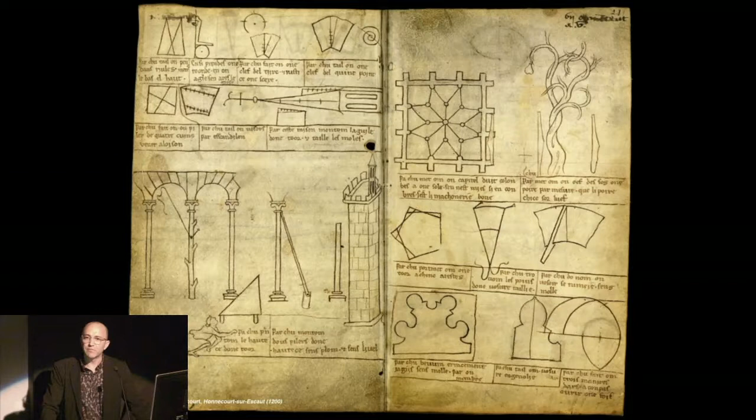If we look back to the origins of where our geometries and formal languages of how we draw architecture and how we draw invisible force flow that shapes our environments, we start to realize that in fact there are discoveries and ideas about geometry that are based in this sort of bifurcation of the experience of formal representation and the realities of complexity and natural form. So, for example, Hugh of St. Victor spoke about the fact that there are two parts of geometry: the theoretical and the practical.

The theoretical is that which contemplates proportions, quantities, and their measures by the speculation of the mind alone. The practical is when we measure the unknown quantity of something by the experience of the senses.

And I think the experience of the senses is a really important part because he's suggesting in a lot of ways that we don't actually have the full capacity to touch all of what geometry is actually calling from with all of our senses.

There was also the idea of Jordanus Nemorarius, who was starting to take these ideas of geometry and constructing mechanical models and developing ideas of invisible force flow being represented by vectors and the idea of equilibrium.

One of the origins of this idea of equilibrium is incredibly important because it suggests that things come to rest. And that idea of rest is probably the way in which most of us have been taught about structures, which is through statics, calling from the origins of this idea of mechanical systems that are in fact at rest.

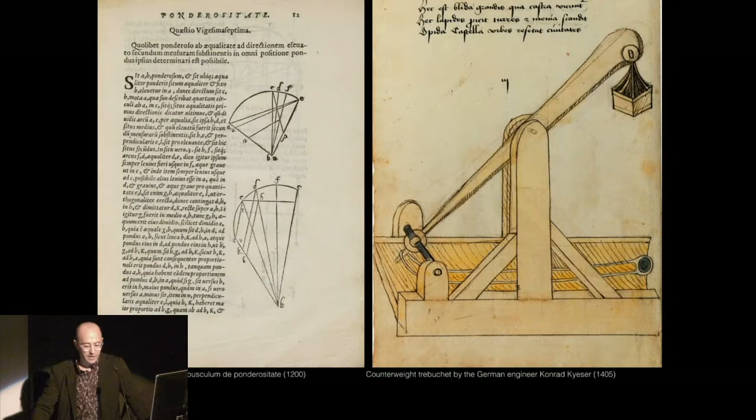It wasn't until about 1866 when force flow was represented in more than just a singular linear vector, when force flow suddenly became more like a current, a river, a direction of wind that in fact is not singular, but a series of vortices moving through space and through matter specifically.

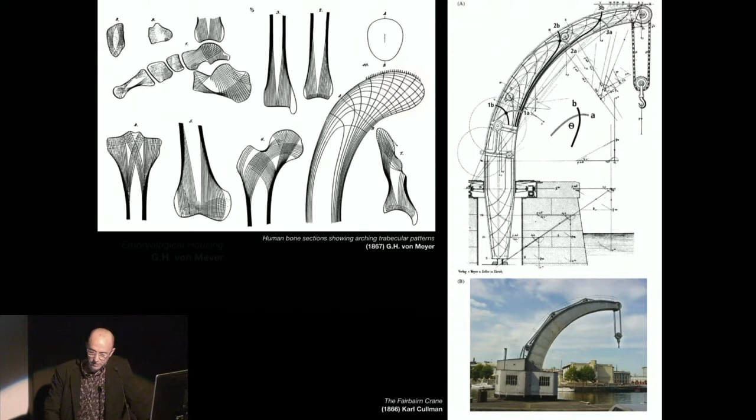So what we see here is Karl Cullman, suggesting that the arched patterns in the section of the human femur are similar to the shape and geometries of the crane he was designing, and that the forces moving through them would develop something called principal stress lines. These stress lines are a simplification, a reduction of these force flows, dividing it to say here's where compression is, and here's where tension is.

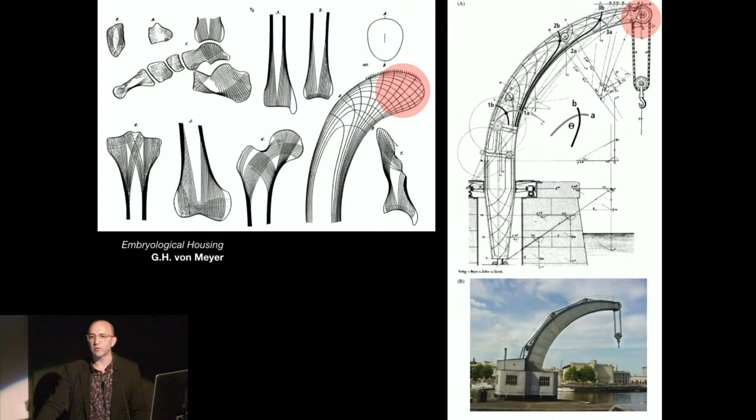In fact, most times they're at 90 degrees from each other, and that's how we get shear, if you look at diagrams. So these ideas, of course, persisted.

But the thing about force flow is that it was soon discovered, or previously, by Robert Hooke, but Sir Christopher Wren, who knew Hooke, recognized that these forces could be used as a geometric tool for design.

And of course, that in itself is something that Gaudí took through his stereostatic modeling and three-dimensional constructions, using it as a design tool.

So suddenly force flow is migrating from this thing that is representational, worked out in plan on paper as premeditated planning for the construction of a static object, to something now where force flow is a dynamic property.

Something that's able to be worked with through dexterity, if you will, for the architect or designer, to adjust and respond based on the physics of what's happening, the physical computing of the materials he's working with.

Ivan Sutherland at MIT developed Sketchpad in 1963, and this was the first time that this idea of a moving modeling system for force flow could be understood by designers, but specifically through computation, moving out of the physical and into the digital.

And of course, in between, we have people like Frei Otto and others. Frei Otto was around this time and later, working with physical modeling and so forth, but actually Sutherland was the first person to start to put it towards computation.

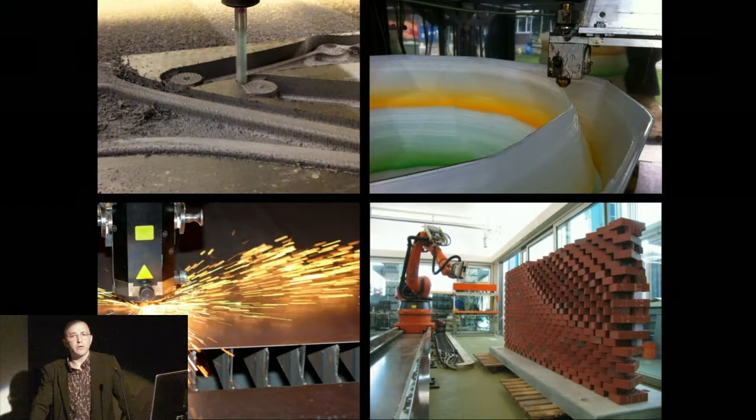So the work with these new origin materials or tools and machines, if you think about it, are actually still using the same brute force we've been using for over a century to construct and shape matter to our will. So all kinds of materials are becoming shaped by the same methods we've been using, which is the single-axis machine.

It's the same thing that's been used for cutting plywood, for the same thing as rolling steel off of a mill. These prismatic sections and shapes are in fact the same tools being used to rotate the gears to move a robotic arm, to move the printer for the 3D printer, for cutting lasers, and of course for machining.

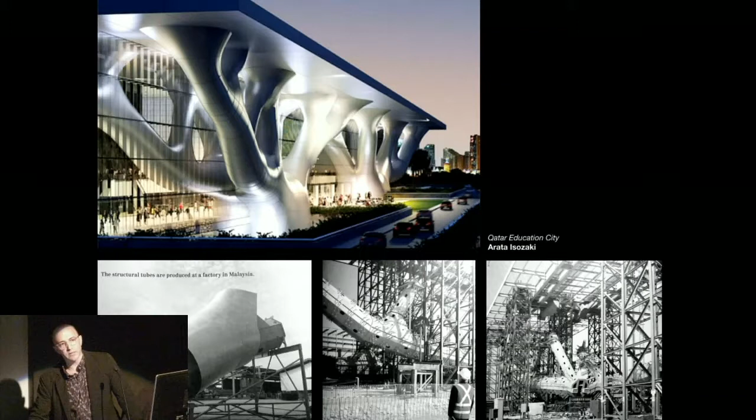So when we see projects that use parametric design to come up with fantastical shapes and unusual geometries, which may be structurally efficient once built, they don't actually take advantage of that parametric behavior during construction. Nor do the materials themselves take advantage of the efficiencies they offer through their own natural parametricism, the way they respond physically to force and action.

All of these ideas are linked to the origins of the division between the designer and the maker, after the arts and crafts movement, when we started moving from conceptual instruction to the empirical, as-built condition. Rarely was the movement of ideas going in both directions—it was very much in a singular direction. And that hasn't changed a lot, actually.

While there's a wide gamut and scope of work and research being explored, there is still this implicit idea that the designer designs and materials follow.

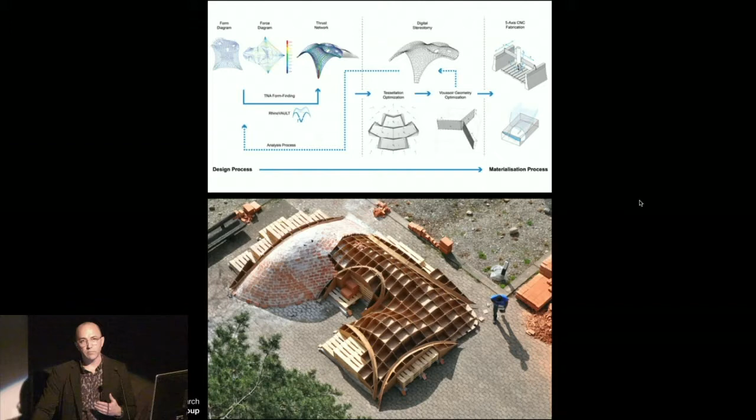If you look at Block Research Group's projects, this experimental thin shell masonry vault work comes off the traditions of Guastavino. You can see that the design process coming to the materialization process is linear in nature, directive in nature, incredibly efficient because the tools being used help facilitate that workflow. But what this does is still treat materials as passive actors in a physical condition that they could arguably participate in.

Ursula Franklin is a favorite of mine. I really appreciate her perspective on the idea of technology. She gave a great Massey lecture on CBC related to that issue and wrote books on it.

She describes technology as a multifaceted entity. It includes activities as well as bodies of knowledge, structures as well as the act of structuring. Our language itself is poorly suited to explain the complexity of technological interactions. How does one speak about something that is both fish and water, means as well as ends?

I think this is what I'm trying to get to—this idea that tools are in themselves not wrong or in the wrong direction. But the way they are designed and utilized often preempts the participation of other forms of knowledge and information that could inform our design and construction workflows when we think about new forms of architecture in terms of efficiency, geometries, and architectural expression.

So I put this forward: in order to achieve a holistic approach to technology, we must first attempt to confront the unencumbered and natural state of material and energy systems, unmediated and unrestrained by the limits of our current logic. I think this is something we're not very good at.

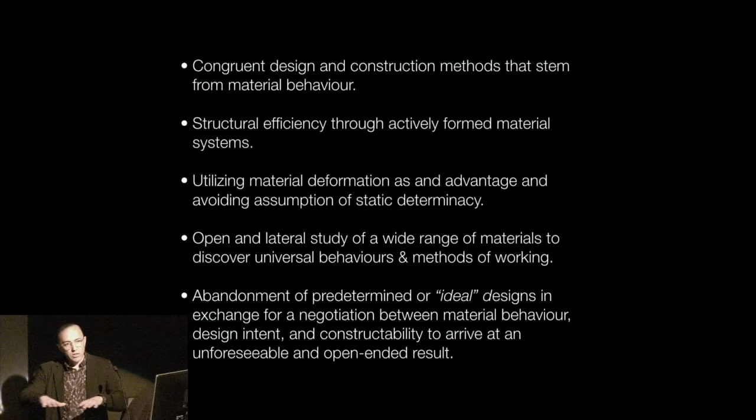Structural efficiency through actively formed material systems means treating materials as active participants — when activated, they become stiffer and stronger, and offer new geometries to play with. We utilize material deformation as an advantage, avoiding the assumption of static determinacy, and conduct open, lateral study of a wide range of materials to discover universal behaviors and methods of working, connecting ecosystems of behavior together. This means abandoning predetermined or ideal designs in exchange for negotiation between material behavior, design intent, and constructability, to arrive at unforeseen and open-ended results.

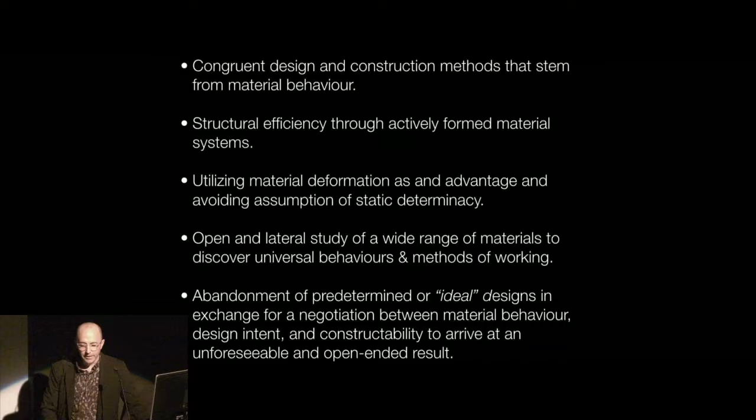As Lola mentioned, I've been doing this since I arrived at CAST in 2015, and since then have honestly been playing. The way I was raised, and my structural engineering background, didn't prepare me well to actually understand material behavior. I can design and predict static systems, and generally understand what's going on inside materials, but I had no idea how to play with them.

By starting out with materials like plaster, we realized early on that the liquid-to-solid nature of things like plaster, which cure and crystallize like concrete does — without going through phase change like ice, for example, which can go backwards and forwards — can be analogs for other liquid-to-solid materials. So when we play at a one-to-ten scale, you can play and predict at full scale.

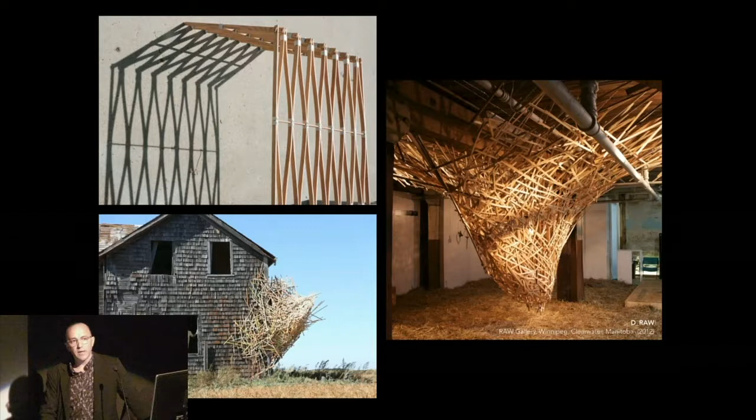Wood systems were other materials to experiment with, with their anisotropic properties — their ability to have grain and orientation and bias, and histories from what they once were as a tree and what they are now. Their desire and memories of that coming back during construction and making all contribute to the idea of flexibility in wood systems and what those can generate.

The right project was an installation I did with Ronnie Araya, an architect in Montreal. This structure evolved out of a negotiation and conversation between us and the structure — hammering these thin strips into the cracks of the wood structure above us and the floors, and starting to weave downwards together.

Fabric has been an incredible partner to work with, consistent throughout all of this work, because fabric is quite expressive. The material systems it offers allow for things working with projections, which allow for a reimagining of the ideas of perspective and Cartesian projections of structural forms and shapes, and how those can be deformed by projections.

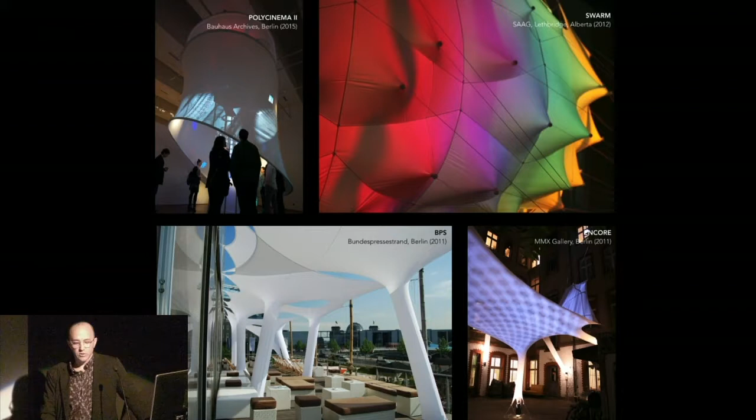Wax came about as an experiment to play with ice inside. How do you work with liquid to solid materials that can reverse cycles, and how do you work with it at a hand scale?

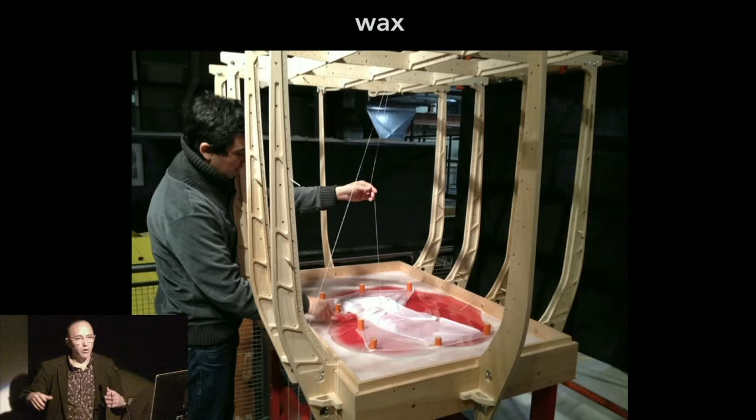So this is a modeling machine that uses engine block heaters underneath it to melt paraffin wax, and magnets are those orange pieces, and the string represents ideas about the actions one would take as a designer to shape structural forms. The wax itself is a good analog for how one would apply another liquid to solid material, like ice, water, or concrete, if you use things like shotcrete or trowel it on by hand.

Photographing them afterwards and looking a little more carefully at what they present as an after effect, the result of these actions, starts to speak to the way these structures present themselves in the world as archetypes and as architectural language that we are interested in.

I'm going to focus specifically on two materials. The first is fiberglass, and the way I began working with fiberglass was literally just trying it out. How flexible is it? What is it like?

This is fiberglass rebar. It's typically used in materials like this and in very expensive projects where rusting and spalling are predominantly the failure mode, and it's expensive to repair things like bridges. But fiberglass rebar does not fail the same way—it has an incredible capacity for tension, but also elasticity.

So by letting go of the material, we begin to sense, in the origins of that geometry definition, the way the material behaves. But this, of course, is not a new system. This is, in fact, hearkening back to those origins of efficiencies and the ideas of creating complex structures using minimal material, minimal construction energy, and highly efficient space creation.

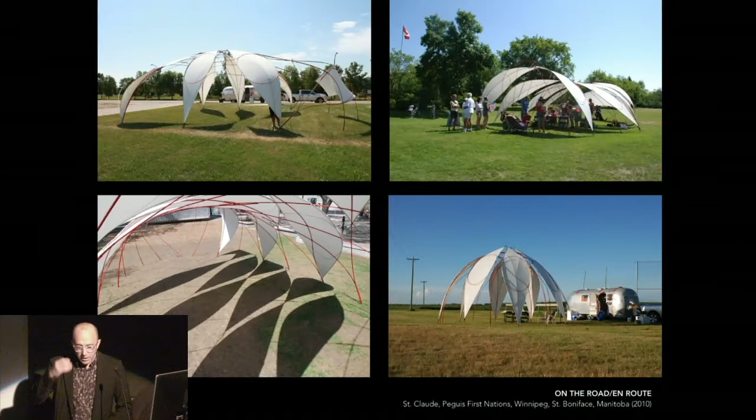One of the early experiments was a project based on traveling to seven different remote communities and working with community members there to bring modern art to their venue. This involved carrying 60 bars of fiberglass rebar on a 1967 Airstream trailer and showing up with community members to erect different structures in each community, based on the same bars but with different patterns.

What we're looking at here are these temporary art gallery venues, programmed in lots of different ways. But this was the first time I began to understand the relationship of the role of the designer as a curator rather than one that dictates the form.

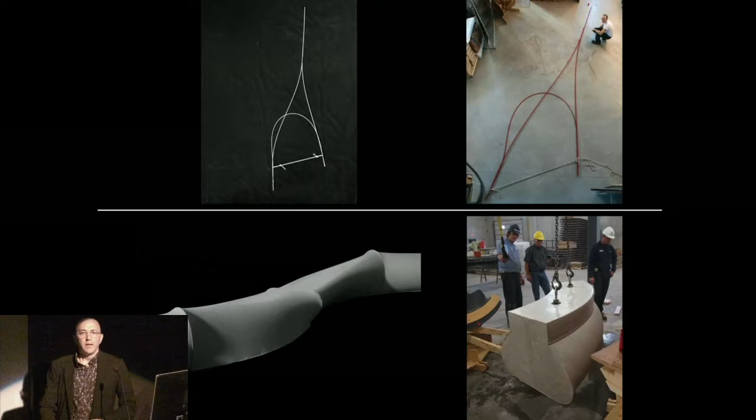This idea about synergies came to pass in a profound way when I was developing a workshop for Rochester Institute of Technology, where they wanted to build a prototype of one of these structures for their winter festival. I was trying to figure out how to send the bars—I couldn't be there early enough to prefabricate the structure for the students. In fact, it was going to be run as a workshop, so I sent instructions for them to receive the materials and start shaping these structures before I got there.

At the same time, Professor Mark West, one of the preeminent experts in the world on fabric-formed concrete structures, who also founded CAST, and whom I worked very closely with for over a decade, was working on a bench at the Women's Hospital in downtown Winnipeg.

He was working with hydrostatic structures, trying to fill sacks of formwork lining, essentially a landscape fabric, to figure out how to make sections of a bench and join them seamlessly so that the curved shapes meet when casting them separately. He began having conversations with engineers around the world and realized that the shape his bags were making was the exact same shape he was working with in model form - the purely elastic geometry called elastica.

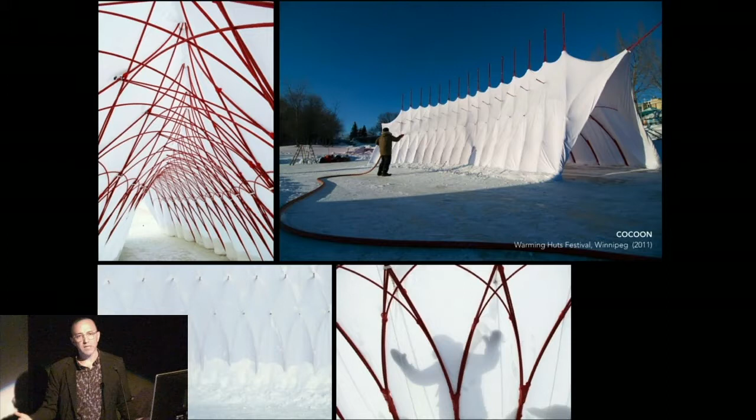From there, I worked on projects like Cocoon, which tried to integrate and synthesize the use of fabric-formed ice and the bending active frames of the fiberglass rebar to create that tunnel system.

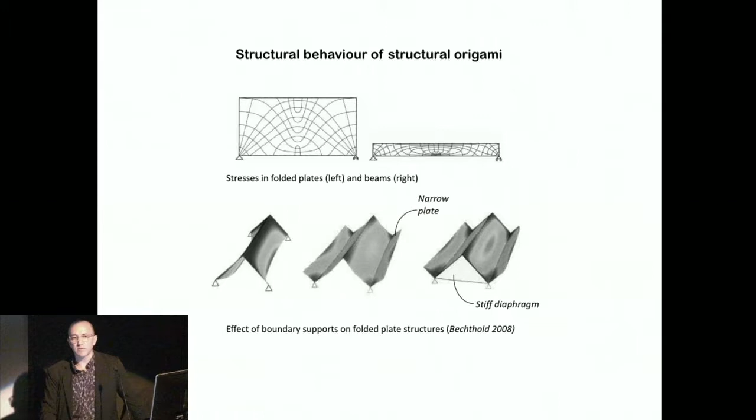The first project I want to talk about in more depth is Fabrigami. It was also for the warming huts in Winnipeg, and we decided to work with the idea of origami as a self-organizing building system, and how the structures themselves act as beams that are inclined and leaning on each other to convey forces across them.

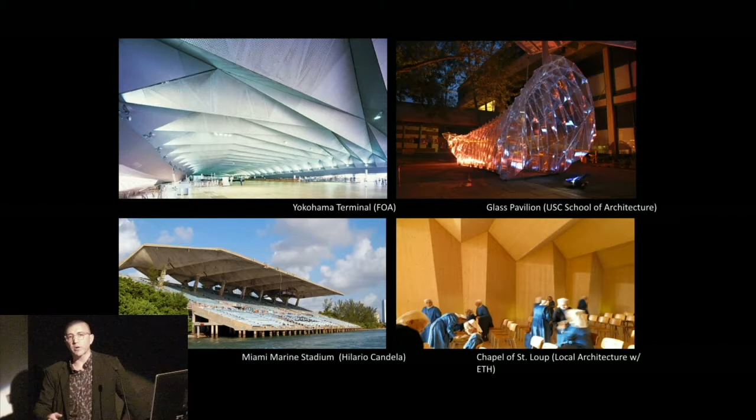But from all the origami forms that we've seen in our histories, there have been very few that have used the actual origami nature, the self-organizing principle of structural order through folding, at a full scale, because the material systems they're using come out of these origins of industrial modern shaping through force. So we tried to combine the idea of fabric-formed ice and origami structures.

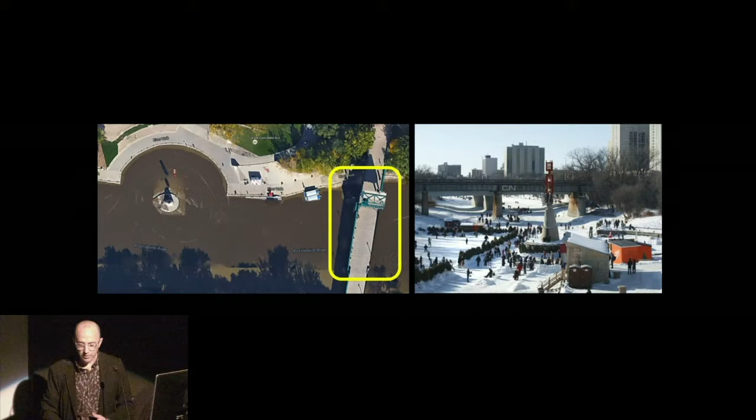The first work was figuring out the site, which was the bridge. Here you can see in the yellow, this is the bridge, and this is a counterweight, a giant concrete counterweight, to lift and raise and leverage the bridge to make space for the boats underneath.

From there, we found a basic origami design which is structural in nature. Not all origami is - some origami is simply behavioral and dynamic like a mechanism, and some are static structures like this one. We began to work with digital tools to figure out how to work with the edges of the folds as a way to work with the linkage to fabric.

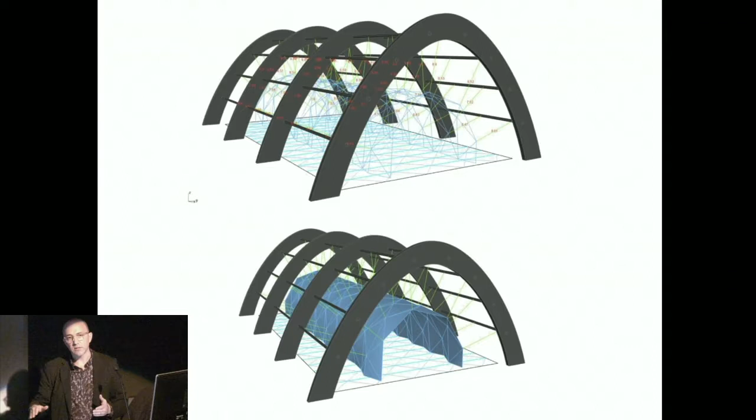If we can control the parts where fabric is being pulled taut, and we let the fabric self-organize in the valleys, then we can make a building system that's doing the folding for us.

So we began to stitch out and lace out the folding for the lacing of the fabric. You can see on the top right and top left the pulling tight of that fabric creates the general outline of the origami structure. If we lay the fabric on top of that, the fabric hanging from it will actually make the cavity system.

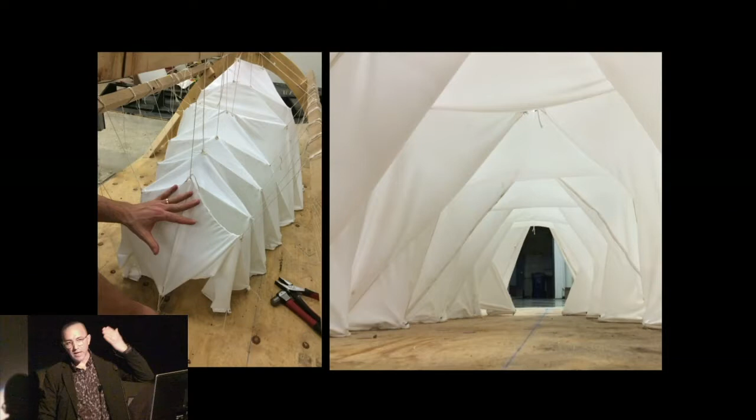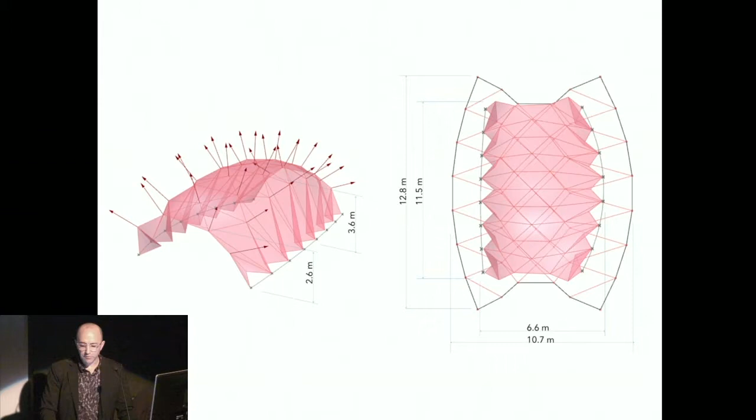So we began to explore this in a range of typologies, forms, and evolutions. We had a final form that we ended up developing, making it a bit asymmetrical to make space for seating.

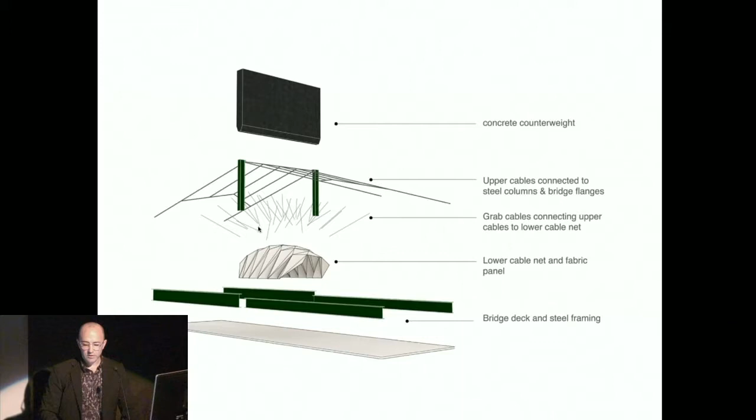We began to think about how to make an upper cable net system, which is this system right here, and then a secondary system for grab cables. Those grab cables would pull the whole thing up like a marionette, and then anchor the fabric down to the bridge deck itself.

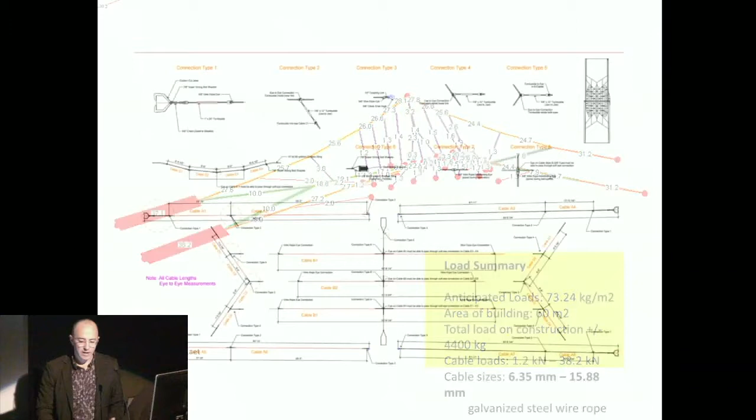We worked with the loading to be able to think about the size of the steel cables and the rigging, breaking it up into constituent parts that we could have prefabricated. Then we worked in our center space here, our largest space on campus, at least in the architecture school, to lay out the cable net and then put the fabric on top that we sewed and cut the holes.

And the construction, which is always the fun part. Essentially we laid out the construction here.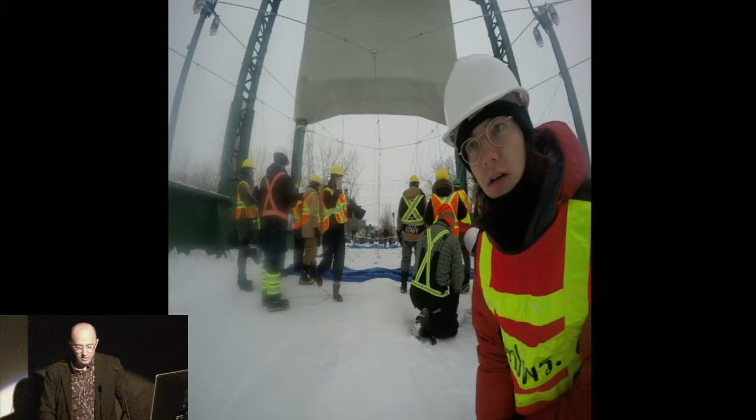You can see the upper cable net is in place - that's the part that's shaking a little bit. Then the vertical cables, the grab cables, came down through the holes and grabbed the net and then went up and down through.

So it goes all the way up and through. And then from the inside, we can pull up like hoisting a sail, essentially, till the whole structure became volumetric like we were anticipating. And we would then align that with

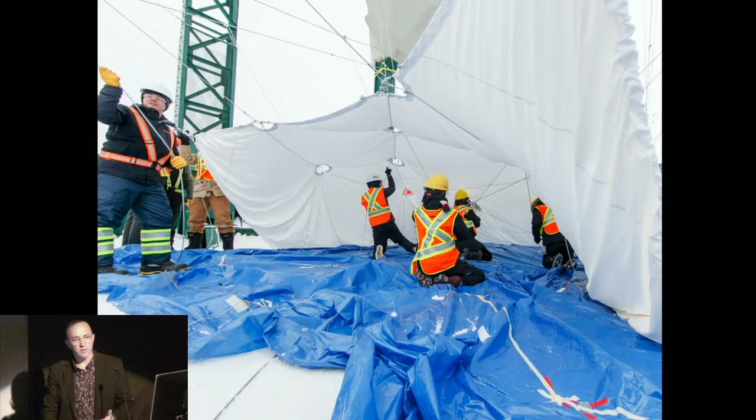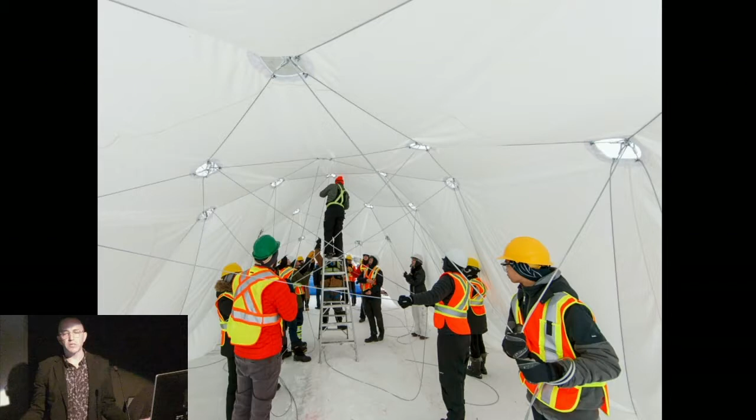our measurements to see how close we were getting. So the act of making it was actually a revisit to the question of design. So the cyclical process was actually thinking about that. And then these moments where you stop and you realize, wait a minute, I'm building in foundations, and the foundations, which are typically piles, are suddenly piles in the sky.

What was interesting is that you can't fully predict the geometries that the liquid and the fabric will want to make. So as we're watering it, and the temperature is about minus 20, 25, the shapes it's starting to make are surprising. You have moments where they're quite smooth, as you might have expected, and then there's spaces where they're incredibly complex and many, many corrugations on the shell system.

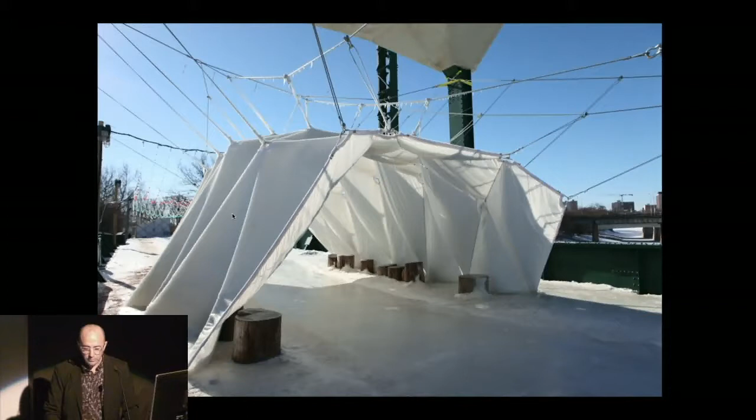So in the end, we had this as a larger geometry. It was not about a strict folded plane with creases, but more about the larger organization of the shells, the structural shells. Because of the double curvature nature of the fabric, which was slightly elastic, the shell forms in between were stronger than if they were folded planes.

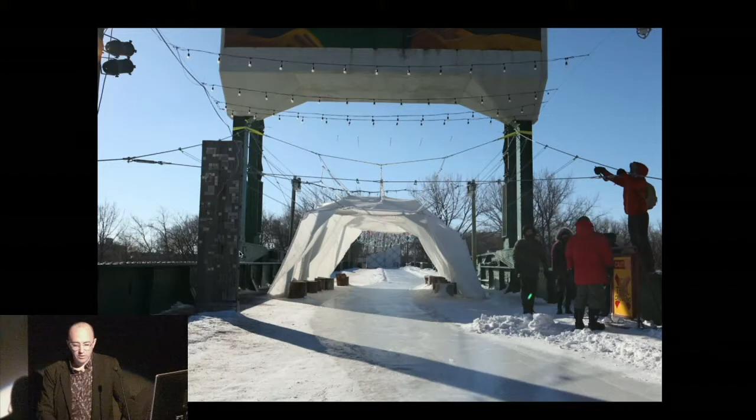So we decided the only way we could really test it in a safe way, because this is a public space, is to essentially loosen the cables. These upper cables, if we loosen them, these are turnbuckles on the sides. If we loosen these turnbuckles, these grab cables will loosen as well. So that's what we did. We loosened those bit by bit, quite nervous and curious to see what would happen.

And here, this is an image of it after they were loosened. So there's not a lot to see before and after. The cables and the shadows are the only things moving, but the structure remains still.

You can see here the cables letting go. And us deciding, well, it hasn't moved yet. I want to hang on it. So we did, and we jumped on it, and we grabbed, and this is Jason Hare on the left. He's a collaborator of mine, and that's me on the right.

And this is a quarter inch of ice, on average, on the whole structure. It's holding up 2,100 kilograms, so about 5,000 pounds of load, of just dead load of water and ice. And our dead loads of 180 pounds each or something like that is not going to do much. But it was still extraordinary, because this is, again, working back with this idea about feeding our intuition.

Getting a sense, banging on it, touching it. When people would skate through this, they would touch it with their bare hands. They were wondering what the thing was, what the material was. And it defied a bit of expectations. I think that's really a lovely thing and kind of something we could be doing more of.

The last project I want to describe is Ice Bloom. Ice Bloom is the culmination of the work that is speaking to a lot of these origins, and it is the subject of my PhD, which builds on essentially these two building systems: bending active frames as a skeletal work, as a sort of a guide for the fabric form work, and fabric formed ice shells, as a fabric formed ice shell, and also as an analog to other liquid-to-solid materials. So it stands in for both.

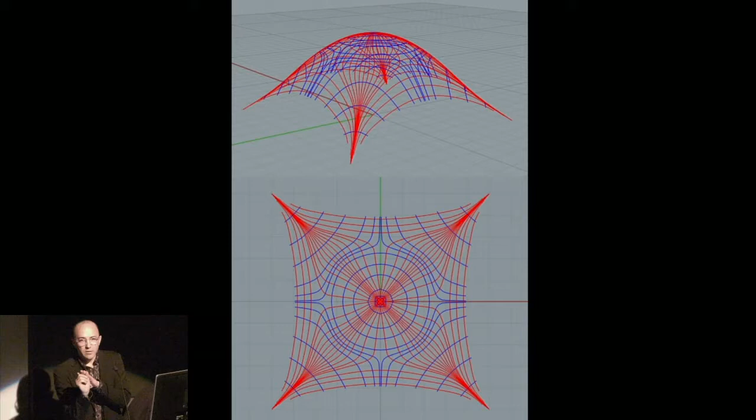We're saying, well, okay, we now have to introduce ideas of construction. And that means these points cannot be converging to infinitely small loci, which are impossible to make. So we have to spread them out, and the shapes began to change a little bit. The geometries of the principal stress lines are, in fact, currents of flow of forces. So the currents don't generally change a lot when you do behavioral or formal shifts like this, but they do, in fact, make a difference.

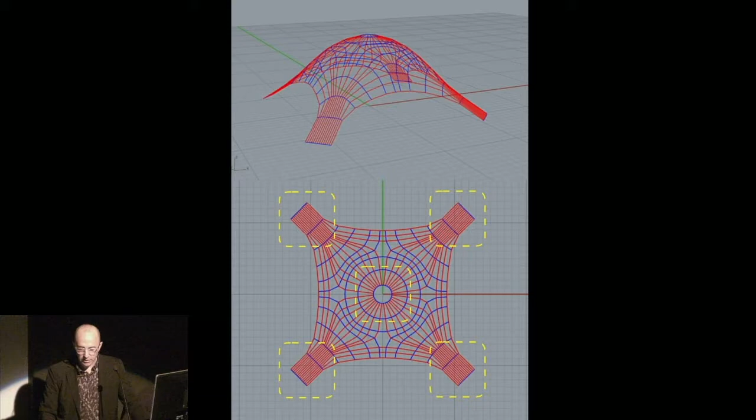These are the spaces where we made size differences. And then Dr. Adriaenssens and Michael Cox, who was doing his thesis project on this project, were doing analysis computationally on the behavior and the performance of these shell structures, saying, okay, well, how do we, in fact, deal with the fabric?

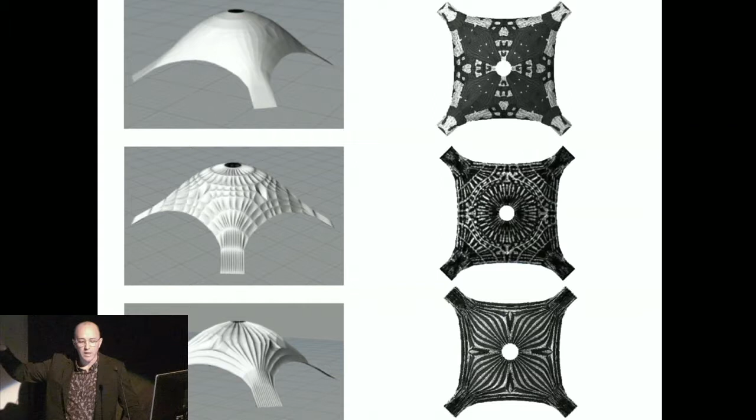If we ideally model it as a smooth eggshell, which is what the top left represents, we get a stress distribution as you see in the top right. If we let the fabric sink into the cavity spaces between the bars, it makes this kind of what I would call an ice tray configuration of the middle structure, and then the right structure on the right-hand side there.

And then if we do this petal approach, where we separate the tension and compression bars, we drop the tension bars down with a sort of a spacer, and we let the compression lines actually run the full length from the foundation all the way up to the oculus. What ends up happening is that you get continuous compression zones carrying the full length and integrity of the structural system.

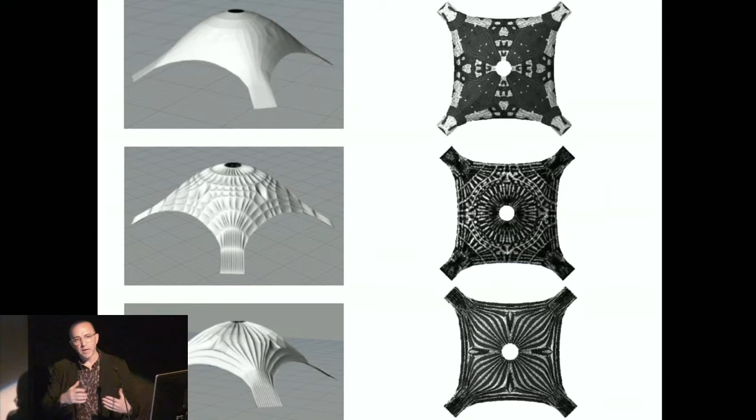And what's even more interesting is that if that's the case, then that means the water itself will self-organize to those valleys. So as we're spraying, the material finds its place where it needs to be. And when it collects in the valleys, it makes three-dimensional beams into the three-dimensional compression zones that force flow is moving in. So how to build it?

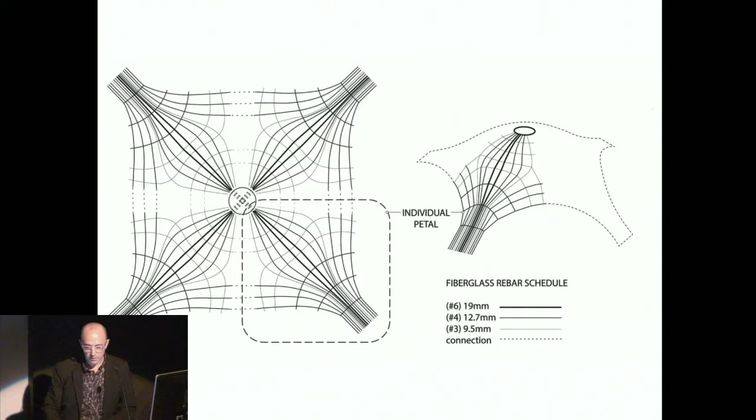So then we started to say, okay, well, let's break it up into four parts. This is one of the petals. We sized the bars based on the bending geometries. That's what the description and the thinness and thickness of the lines are. And then the first question is, could elastica forms—these are piano wires—but also act in the same way before they hit the plastic range, can they make the same shapes?

And in fact, they could. So at the model scale, we see it is possible.

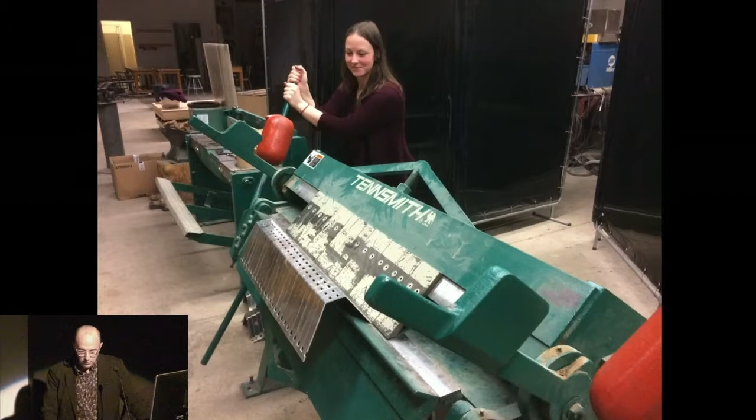We then worked on prefabricating. We made aluminum spacers, custom laser cut aluminum spacers, to separate the tension and compression bars. We then began to lay it out on the floor to cast and organize the bars and the geometries.

So you can see the bars are actually pretty pliable. And we had simple marks on the floor. They're all symmetrical elements, so we had a center line and distances off that center line that would in fact make the shapes that we were looking for.

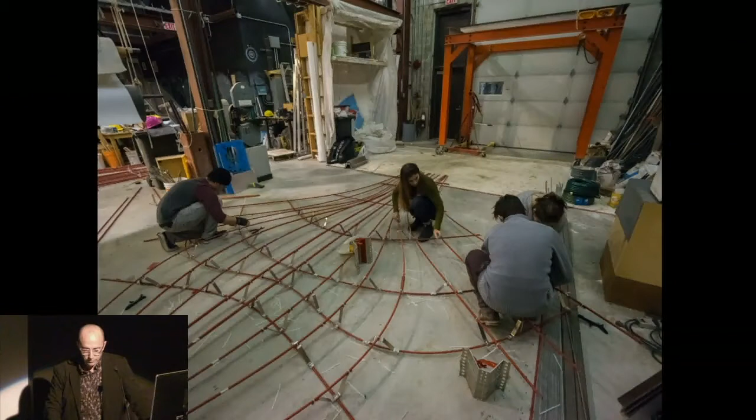And the spacers began to separate the bars from tension and compression—you can see them there, tension on the bottom and compression on the top. And then we would do a lot of sewing and then move these out to the site.

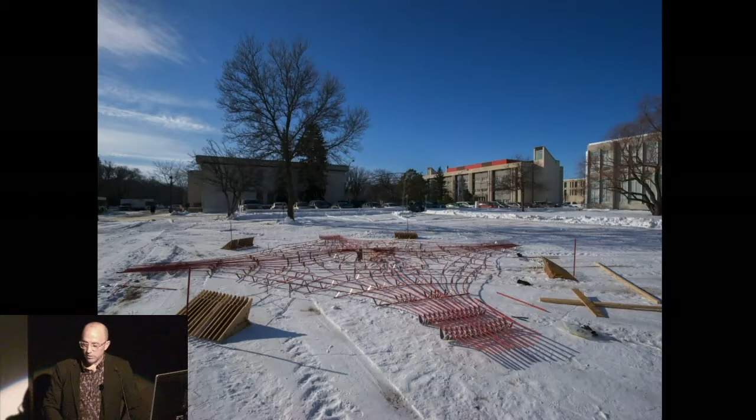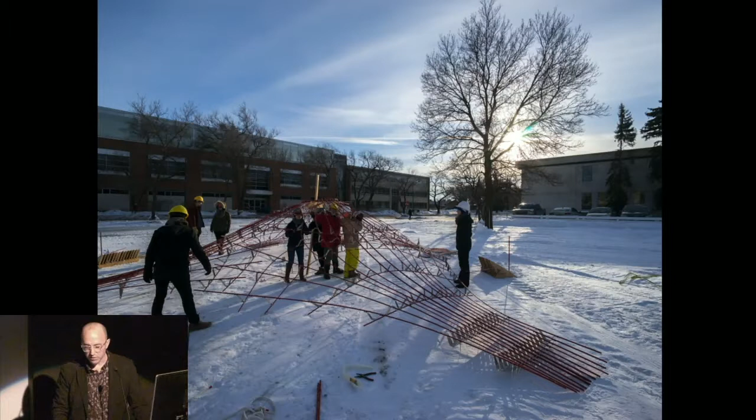We had these things called launchers, which are wooden frames that allowed them to hold each of the bars individually and allow the fabric to stay hanging and sagging between those bars. We didn't want to have suddenly a transition to flatness when we got to the bottom, so we raised it through the middle. Because these are filleted, the project is filleted like a fish in a way.

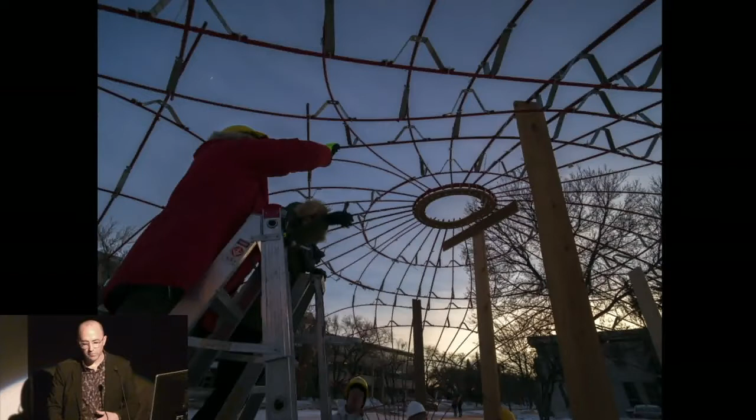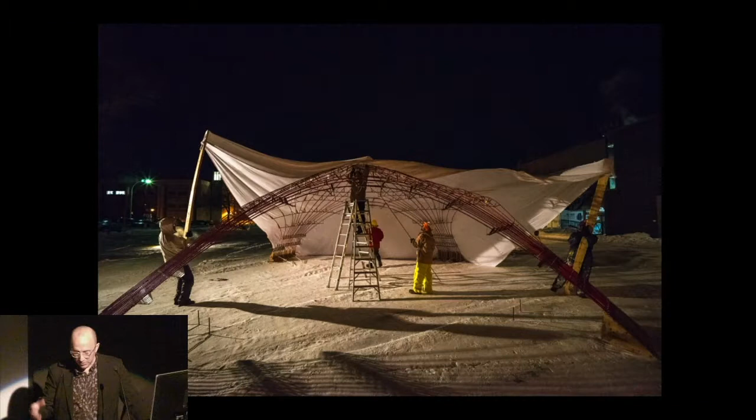As soon as it gets raised into place, the bars have to be tied together, which proved very difficult. The structure finally became sort of in the proper geometry, but was not exactly like the geometry we had hoped. We then pulled this fabric over top, which every time we do a project this big, I always describe as kind of tailoring a suit for a giant, because once it gets on it, you kind of have to deal with the tailoring of it.

So here it is when we first pull the sheet over top. Already you can see the bars organizing those principal stress lines. And then we watered it—we put on about 17 coats of water on this, which produced about 3/16 of an inch of ice.

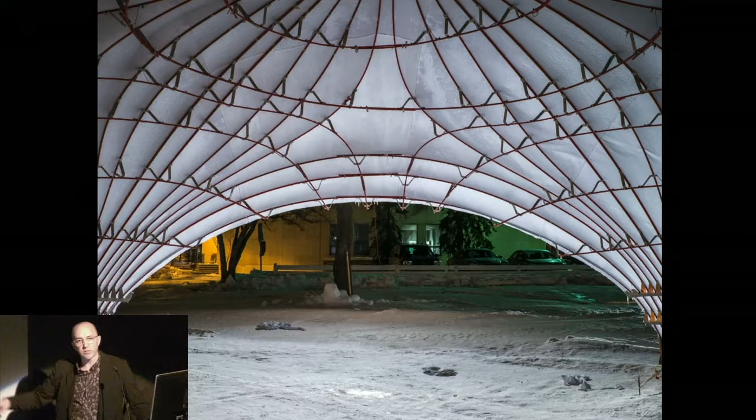And then once it was frozen, we used an X-Acto blade to trim the edges of the fabric off right at the edge, and the water bonded to the fiberglass rebar, so there was continuity from the fiberglass underpinnings to the fabric itself above it.

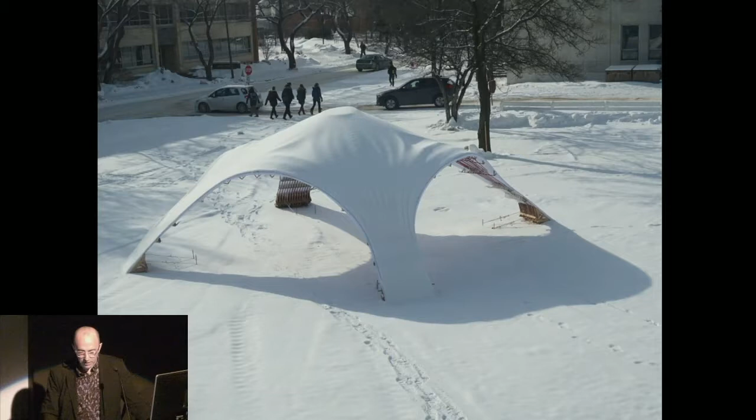And then when the snow fell, you can see the shape it was making. In fact, that was what we were sort of hoping for, but weren't convinced it would actually make. And you can see it's not a perfect structure, right? In fact, you see the lip that's popping up a little bit. That looks like by design, but it's not.

It's because the precision of dealing with this, constructing with big mitts outside, is not exactly the same kind of tolerances we work with in the lab. So we're beginning to recognize that the construction needs to find a correlation with the way that we have to have a degree of precision to follow the computational models that we're expecting to show. So here's a little bit of the view underneath it.

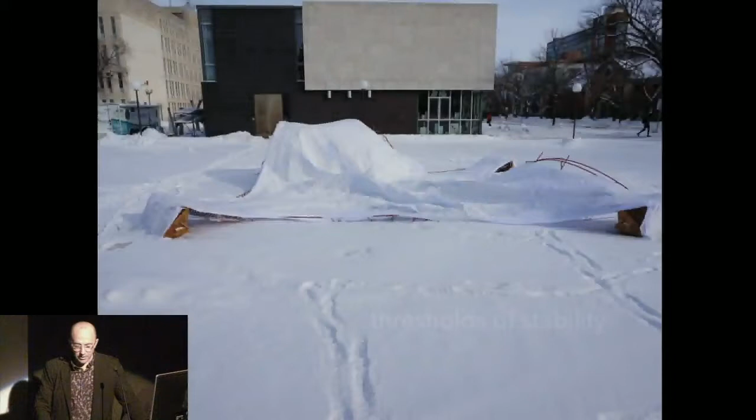Right after the snow had fallen, I was about to go out there and add more water. But because the snow was in the way, I thought, this is where the improvisation happens. Maybe I need to spray and mist it. Do I mist it to make a candy coating of ice on top and add a second layer? Then we'd have a monocoque structure of ice shell, snow, ice sandwich. No, that probably won't work.

Maybe I should just make it heavier, melt the ice down with warmer water or melt the snow down and then rebond it, letting it be a kind of bumpy surface. I said, well, I'll just try it.

So I started misting one side, did not see anything happening. Went to another side, nothing happened. The reason these structures work is because the water coats it, and as it coats it, it gets heavier. As it gets heavier, it freezes after the shell hardens and it gets stronger. You put another coat, it gets heavier, harder and stronger. So layer by layer it gets stronger.

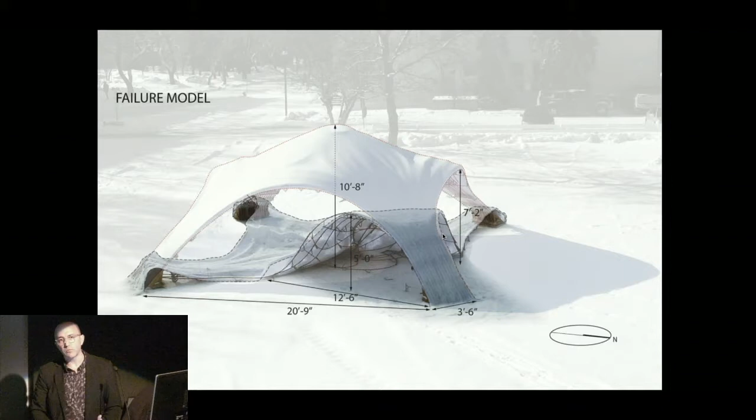But all I was doing was adding dead weight, because the water was not continuous across the surface. It was getting locked up in the traffic of snow on the surface. So when it collapsed, one side fell and the other side, and the whole thing catastrophically failed. We were able to measure the ice from the failure that collapsed, look at the geometries from before and after, and try to recognize that as a lesson for improving the structure.

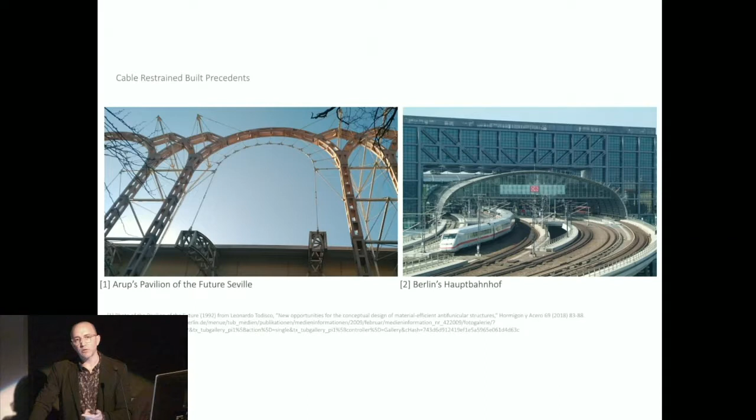So what we decided to do next was look at a supplementary system that would allow us to shape the elastica geometries and provide secondary support, using post-tension cable nets underneath the fiberglass rebars.

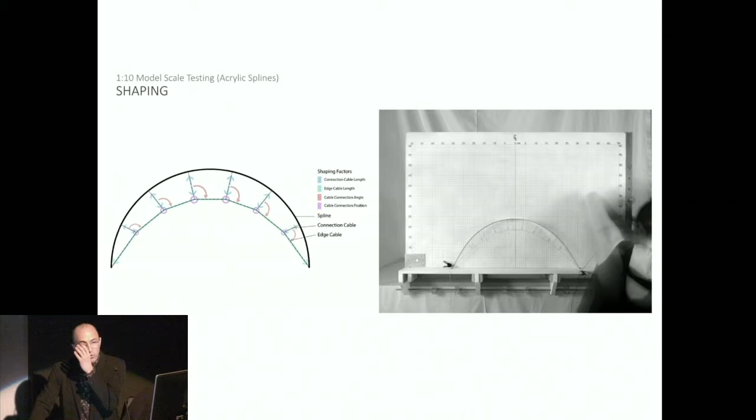We started by using small-scale splines, and these traditions have been explored using two-dimensional structures like this. But then we started to test the performance using little washers, and we discovered that the steel cables were incredibly strong. They allowed us to deform and make multiple variations of shape, from asymmetrical arches to symmetrical arches to flat arches to catenary forms and so forth.

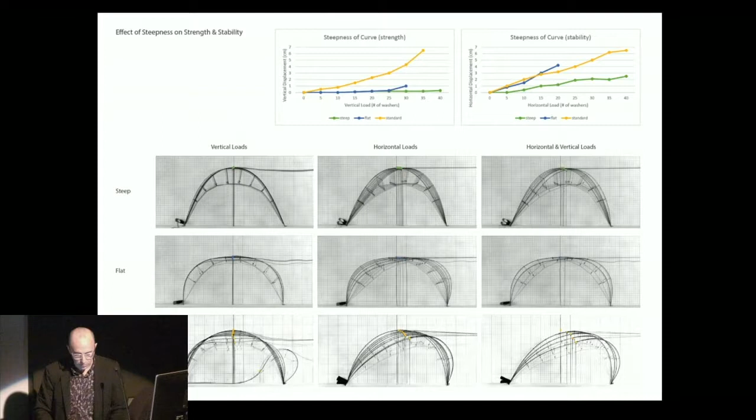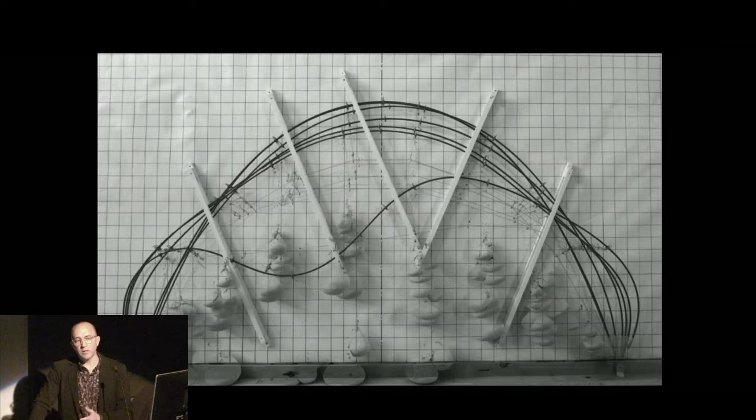We then decided to scale up to the large-scale spline, and these wood bars are there to hold it in plane while we're loading it with sandbags. The results were extraordinary, because we realized the cables were able to, in theory, increase the total bearing capacity of these systems by 600%, which means a lot in a two-dimensional plane, but what does it mean in a three-dimensional system, which we didn't know?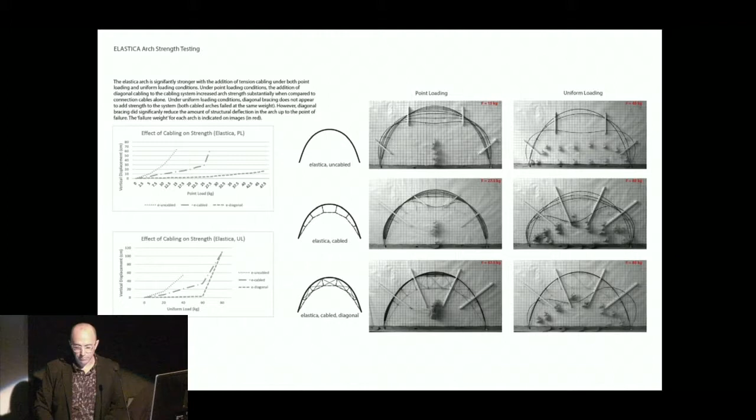So we decided to do that. We essentially designed a vault, again similar to Ice Bloom, but one we could build inside and cast. We also looked at advancing the construction method.

Method one was like Ice Bloom. Up top, you can see we built it in four pieces and tried to put it together, but it was not actually as effective as we'd hoped. Method two is actually taking the scaffold system and building a very simple version of it first to just get the general form up, then having markings on the bars and essentially erecting it piece by piece.

So here's the initial skeleton that went up. Once that was up, actually putting the bars in place was incredibly efficient. You're just literally laying them down, putting them on the marks, and tightening them with gear clamps.

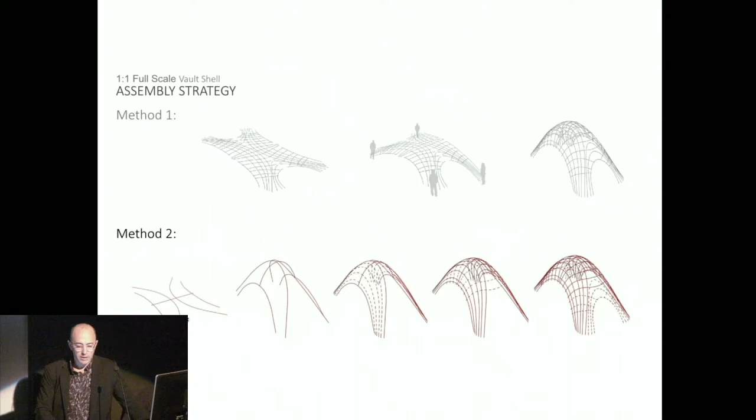So for the initial skeletal form, what's interesting is the design question: what is the initial form? That's the typology for this geometry. But in any other design, it would be a different skeletal form, and that's what I think is the next iteration of the design question.

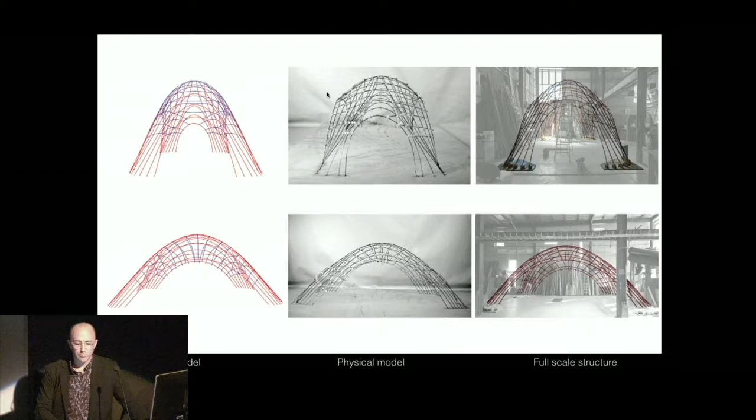You can see here on the left is a digital model, the middle is a physical model we made, and the right is the full-scale structure. Again, you can see variations. This was the digital version, developed from a hanging geometry like a catenary. The elastic properties of the stiffness of the steel are not the same, so it's kicking the sides out a bit, and the elasticity of the fiberglass is also a little different. We then introduced a three-dimensional version of cables that would follow the bars.

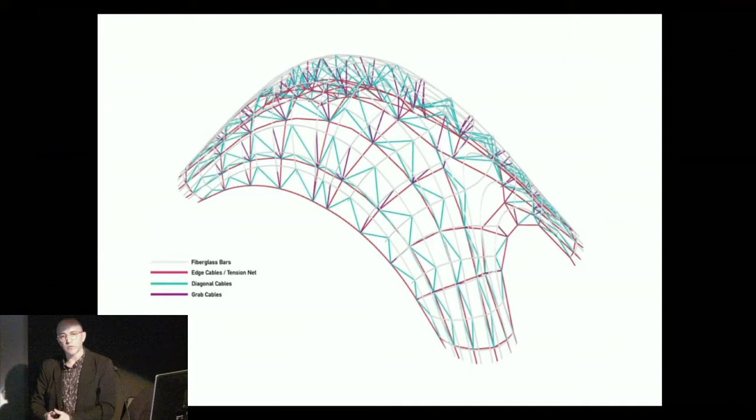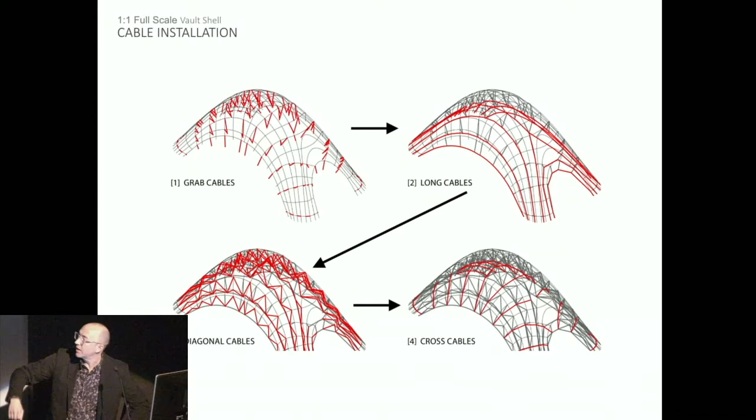So the bars are not straight, so the cables could not be straight if they were relying on those bars. What we did was develop a sequence for erecting the structure. We prefabricated all the cable systems, installed the grab cables first, which reach down and hold the long cables. We then threaded through the long cables, also prefabricated, so those were done and installed quickly. The diagonals took the most time, weaving through the whole structure.

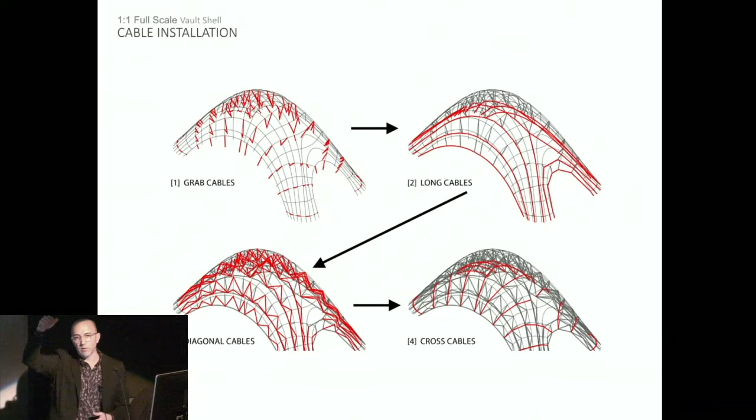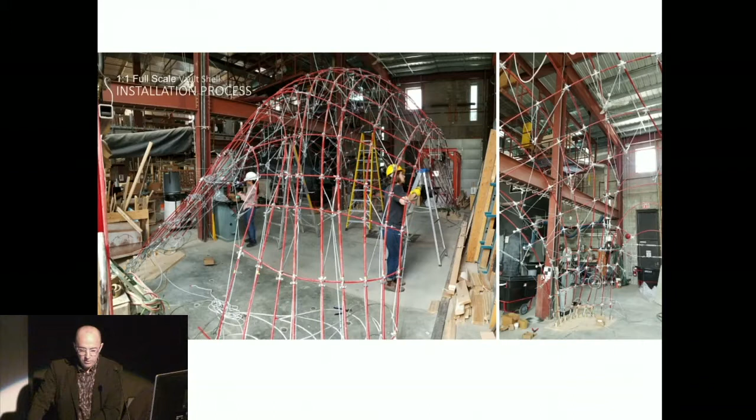This is a picture of the spider web of assembly we were working with. My suspicion is that the diagonals are a bit redundant and maybe overdone. I think we only really need the grab cables, which would increase the speed of construction. But ultimately, this is it in its final form.

I'm not interested in this as a pure structural system. I'm trying to understand it as an expression of architecture, a system of space creation, and a way to expand our paradigm for how we should be building architectures that speak to questions about duration—how long these structures need to be around—and how the act of construction is actually part of the design process, an extension of it, rather than a bifurcated part of the work we end up doing.

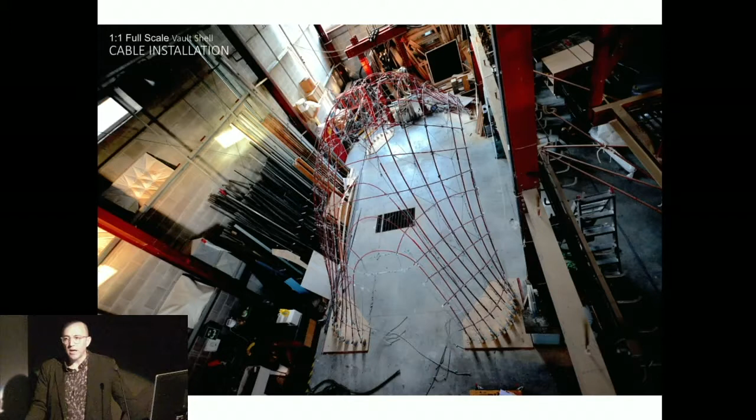How do the materials participate and offer their efficiencies? And how can this lead to surprises and maybe a greater degree of pleasure in the work of designing architecture and structures alone? Thank you very much for your time.

I'm just wondering how the changing weather patterns, wind, or even the sun affected the ice structure.

Yeah, wonderful question. It sounds amazing when the sun hits the ice—it cracks and pops and you don't know what's happening, and when you're inside the structure, it echoes. It's a very loud, cavernous kind of space.

Of course, above a certain temperature, it will begin to melt. Anything above -10 in direct sunlight will literally begin to melt. Even if it's -10 out, the sun angle does a lot, especially at the low angle in Winnipeg—it hits a lot of the structural shapes broadside.

What's interesting is that when I first started working with these ice structures—the curtain wall project, the first one—we sprayed a lot from one side and only sprayed once from the second side because we couldn't get to it. About two weeks in, it was -30 for a long time, then -20, it was fine, standing still. I noticed the fabric was beginning to be exposed on the back side. I started to peel it away and realized I could pull the whole fabric off of it.